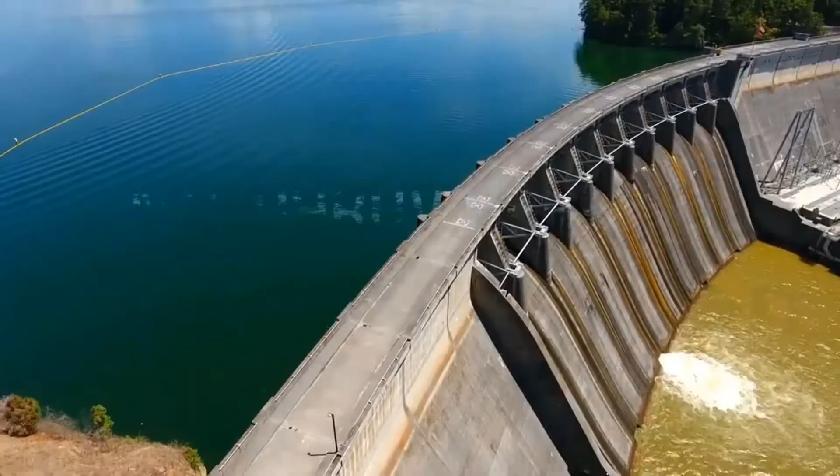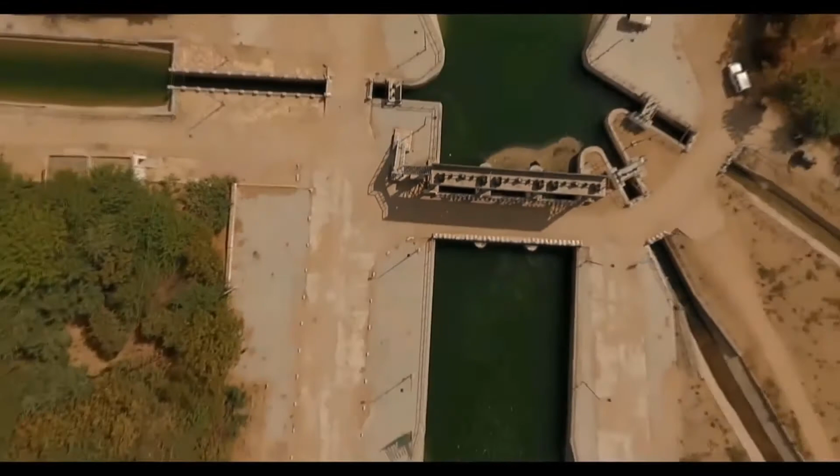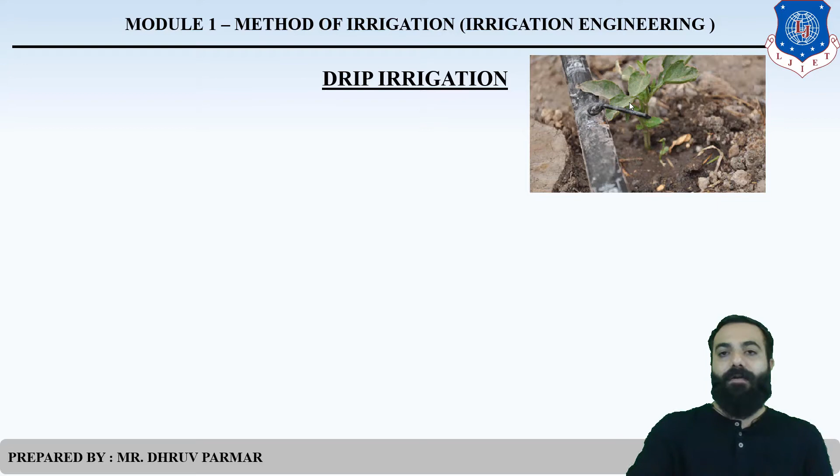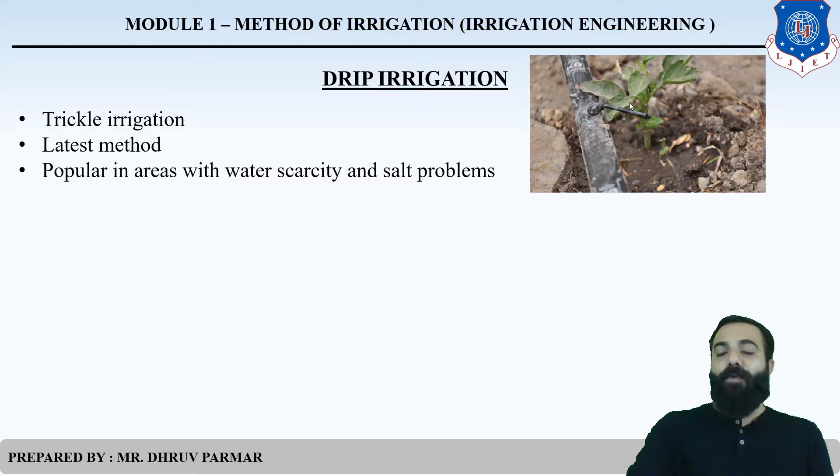Water is applied in the form of drops directly near the root zone, so evaporation loss, transpiration loss, conveyance loss, and application loss are very low or negligible.

One device is very useful that supplies water directly to the crop, called an emitter or dripper. The emitter has drip nozzles that supply water drop by drip at a very slow rate, with a capacity of 2 to 10 liters per hour.

The water applied is sufficient to keep the soil moisture within the desirable range for plant growth, meaning within the limit of field capacity, so the plant can prosper and grow well over time.

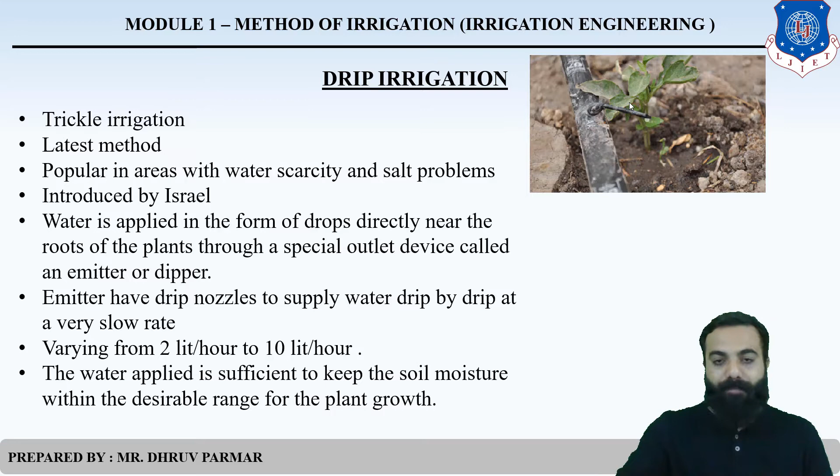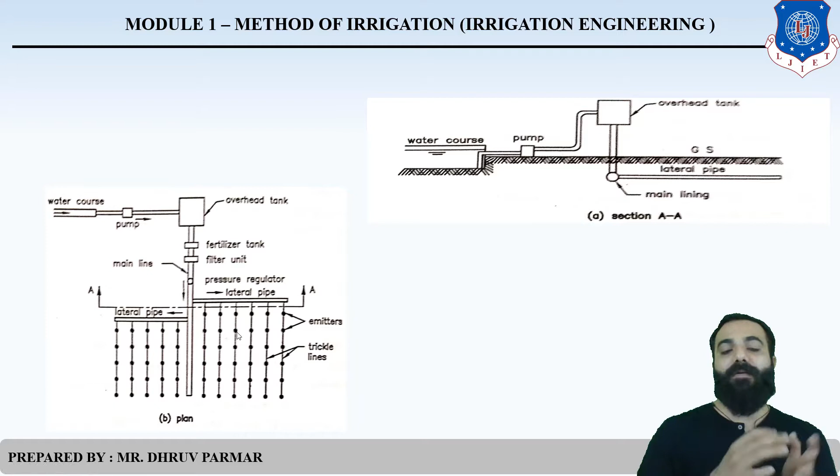This is a diagram. First there is the water course, then the pump, then the overhead tank, then the fertilizer tank if provided, then the main line, then the lateral pipe, and then the emitter or trickle. This is a plan and section used in the drip irrigation method.

There are some components. Three main components are there: control head, pipe network, and emitter. In the control head, various devices are included, such as the pump, water course, and overhead tank.

The second component is the pipe network. There are two pipes generally in drip irrigation: the main line and the lateral pipe, otherwise called the trickle line.

The third component is the emitter. The emitter is very useful for the drip irrigation method because it supplies drop by drop water to the root zone, with a capacity of 2 to 10 liters per hour.

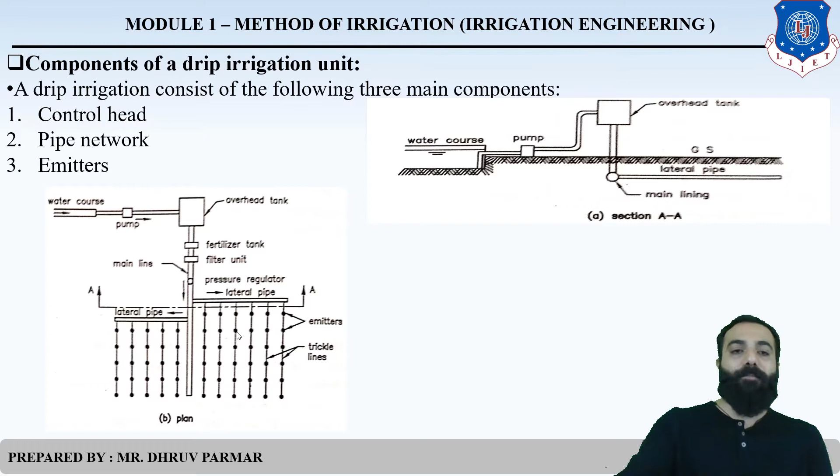So these are the components used in the drip irrigation method, which I already discussed.

The control valve, water measuring device, pressure control device, filters, and pumping unit are all included in the control head. The control head is near the source of water, and the overhead tank is usually sized 3 by 3 by 3 meters, with a head height of 3 to 5 meters.

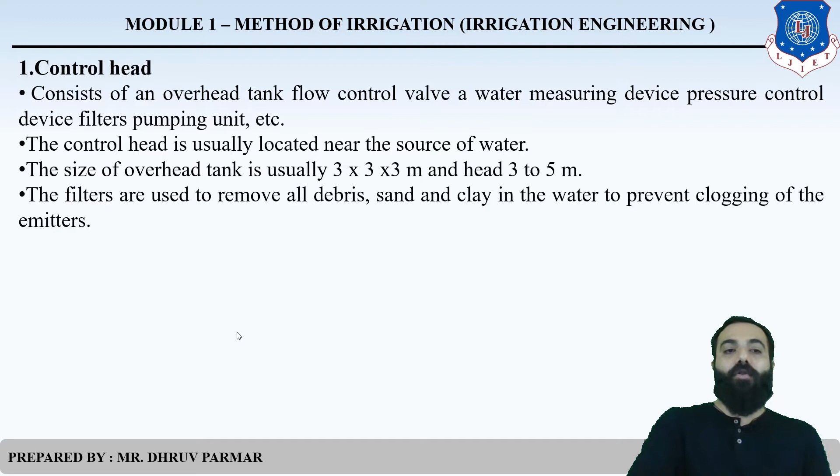There are various types of filters used to remove all debris like sand, clay, and leaves. The use of a filter is to prevent clogging of the emitter, because the emitter has small tiny holes.

And the pipe network, already explained, and the emitter, which is already discussed.

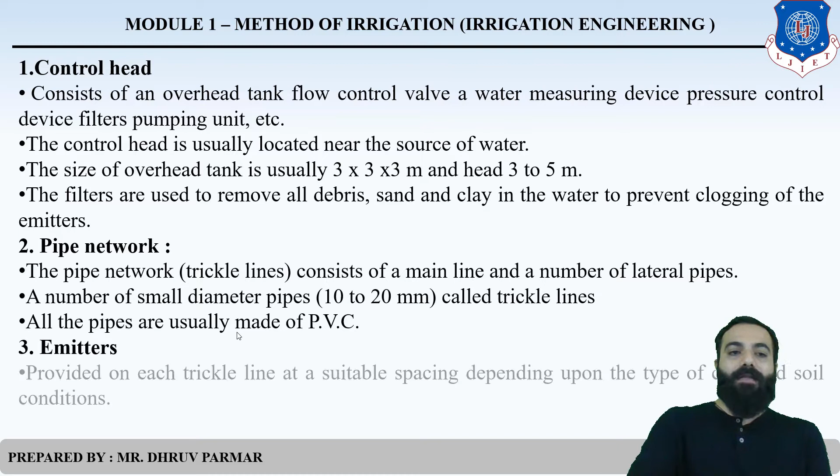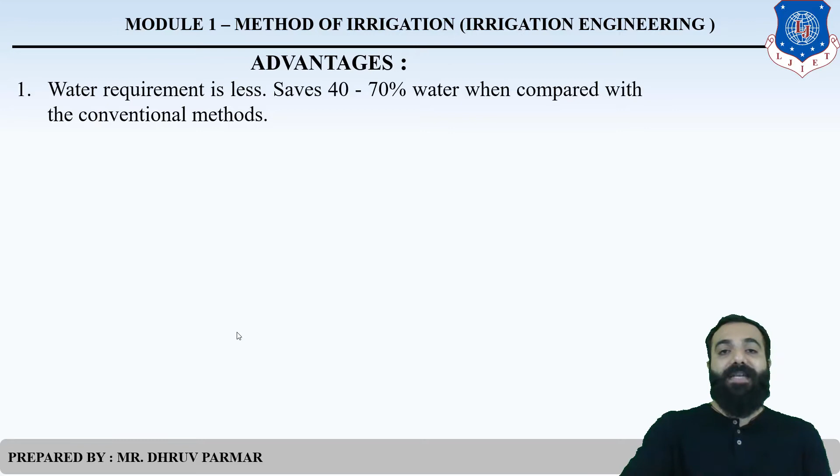Then, advantages of drip irrigation. Water requirement is less compared to other methods, saving 40 to 70% water compared with the conventional method. Evaporation losses are quite low because water is supplied directly to the root.

Labor cost is also reduced, as no field channels or furrows are required. Water logging is avoided because a minimum amount of water is supplied. This method is very useful for small trees, widely spaced plants, and some fruits.

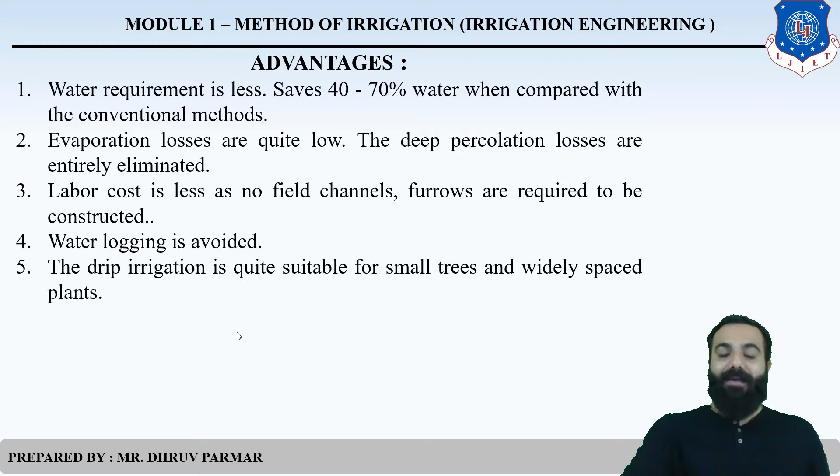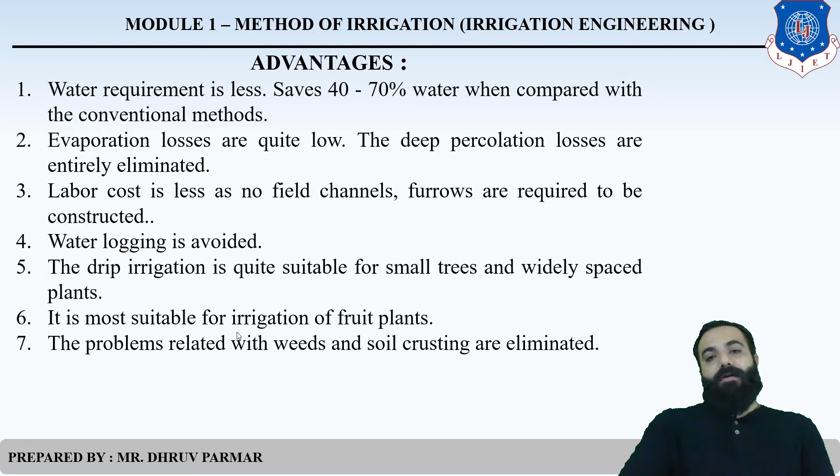Problems related to weeds and soil crusting are eliminated because water is supplied directly to the root. This method is quite suitable for arid regions, and unlike sprinkler irrigation, which is not used in arid regions, drip irrigation is used there.

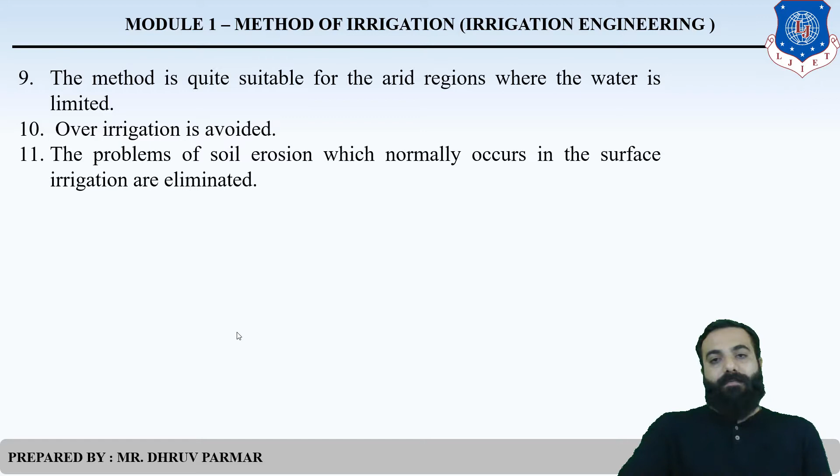Over-irrigation is avoided because there is controlled application of water. The problems of soil erosion, which normally occur in surface irrigation, are eliminated.

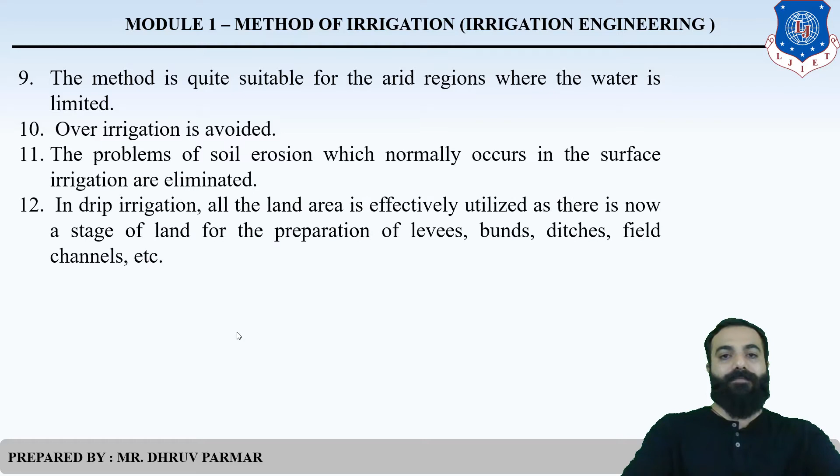So these are some advantages of drip irrigation. Now some disadvantages: initial cost is very high because a lot of equipment is required, such as the pumping unit, filter, pipeline, and nozzle.

The nozzle or emitter diameter is very small, so this hole is frequently clogged by debris like clay, silt, and leaves.

Due to the change of crop or crop pattern, the trickle lines need to be replaced because spacing also changes between crops.

This method is not used for closely planted crops like wheat, rice, and sugarcane, where the crop spacing is very close.

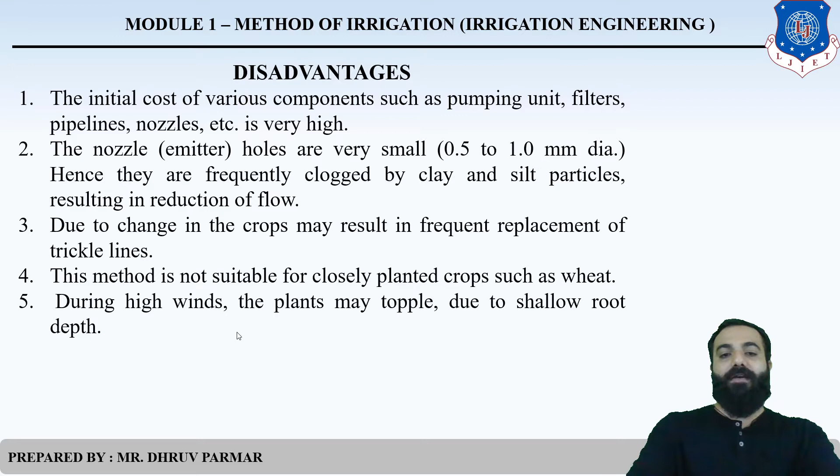During high wind, meaning when wind velocity is high, the plant may be toppled or removed by the wind.

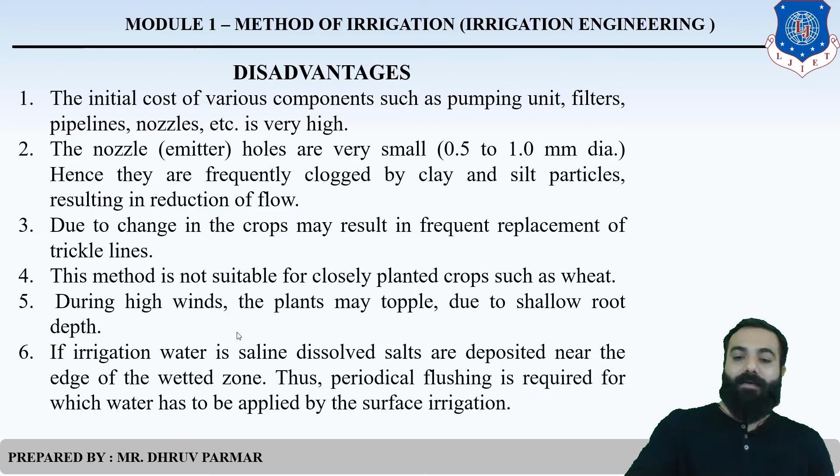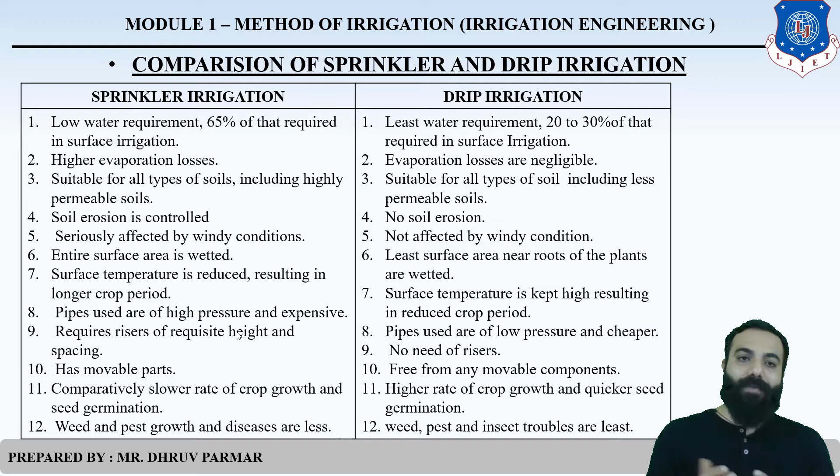There are comparisons of sprinkler and drip irrigation methods, which were already discussed in the theory. Please remember that and take a screenshot if you like. Also, a comparison of surface and drip irrigation was already mentioned. Please take a screenshot, otherwise pause the lecture and read thoroughly.

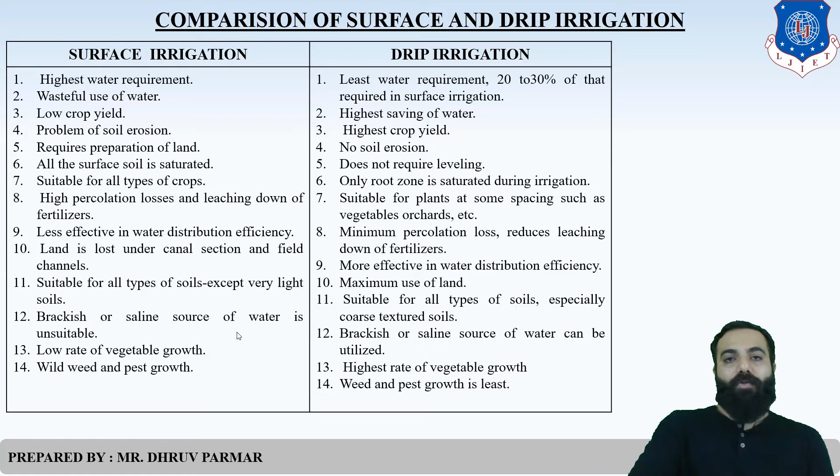So next, drippers. You know that drippers are also called emitters. You already know the use or purpose of drippers, and what their capacity is.

The capacity is 1 to 10 liters per hour, and the maximum capacity is 15 liters per hour. These emitters are used in this drip irrigation method.

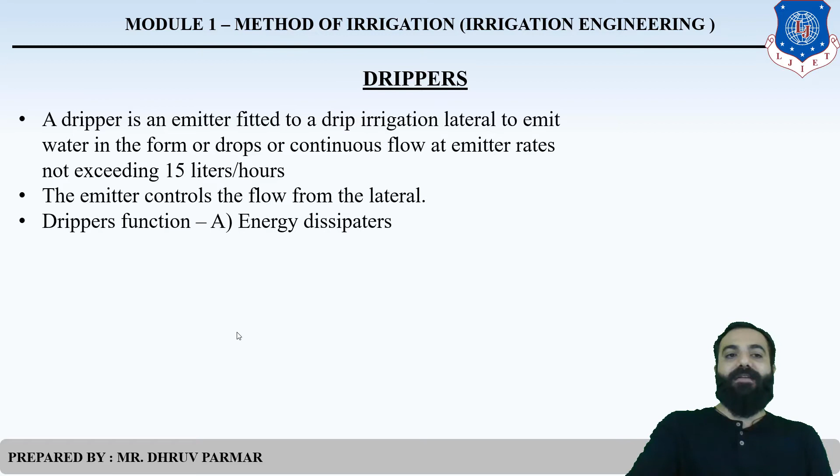Drippers function like energy dissipators. Their function is to dissipate energy and reduce the pressure head in the pipe, from 0.3 to 1.5 atmospheres down to 0 atmosphere at the outlet.

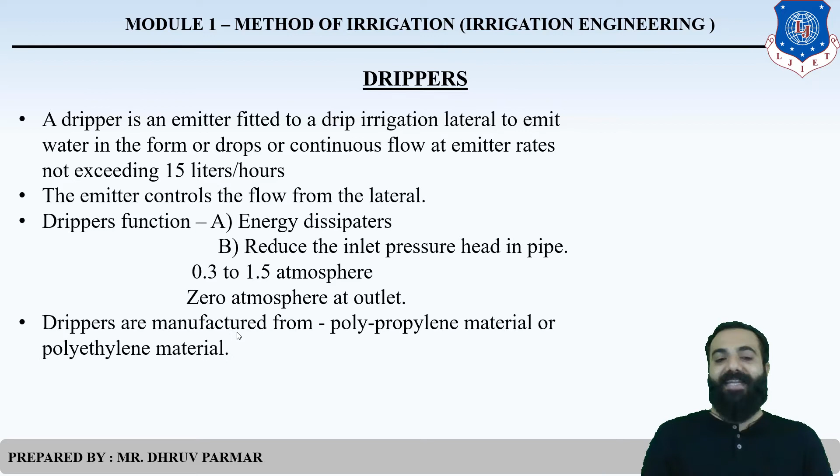So what is the material of dripper? Polypropylene or polyethylene material is used in making a dripper.

There are various types of emitter as per ASAE, American Society of Agricultural Engineers. First, the emitter which is designed to dissipate the pressure and discharge a small uniform flow to the root zone. Then compensating emitter, designed for discharge of water at a constant rate over a wide range of operating pressure, meaning even with differences in pressure, the amount of water supplied to the crop remains constant.

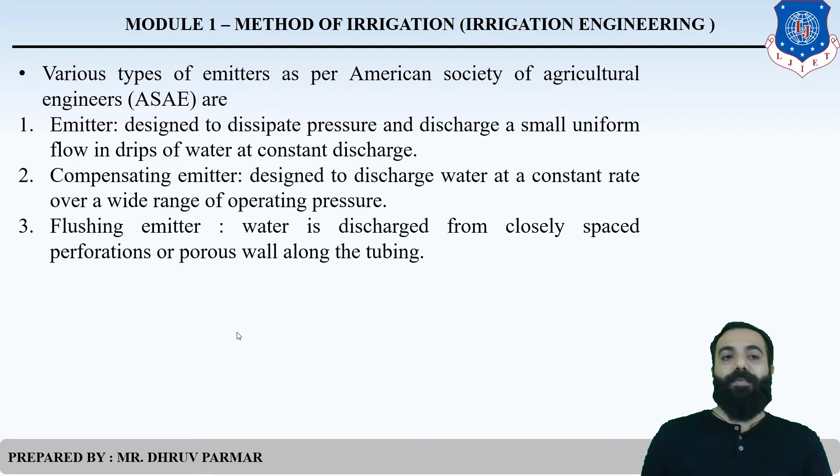Then third, flushing emitter. What is the flushing emitter? Water is discharged from closely spaced perforations or a porous wall along the tube.

Then long path emitter. In this emitter, long capillary side tubes or channels are used to dissipate the pressure.

Then fifth, multi-outlet emitter. Water is supplied through a multi-outlet emitter which has two or more points through small diameter openings, supplying more amount of water to the crop.

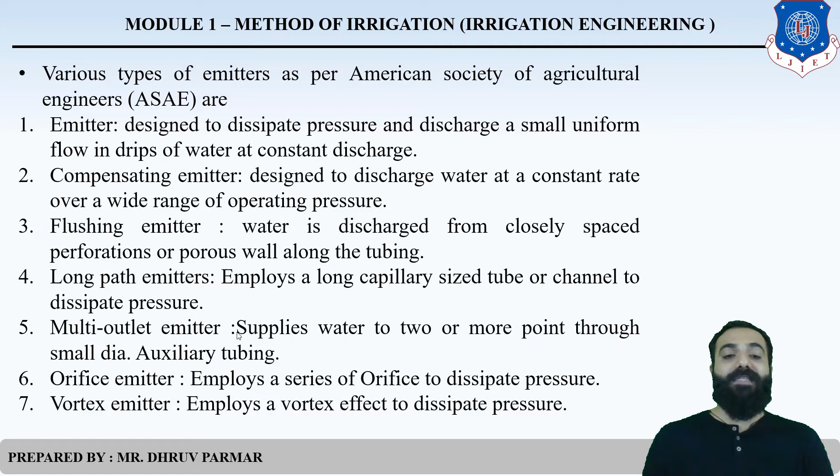Then orifice emitter, again an emitter used to dissipate the pressure. Last one, vortex, which uses the vortex effect to dissipate the pressure. So there are a total of 7 types of emitters used.

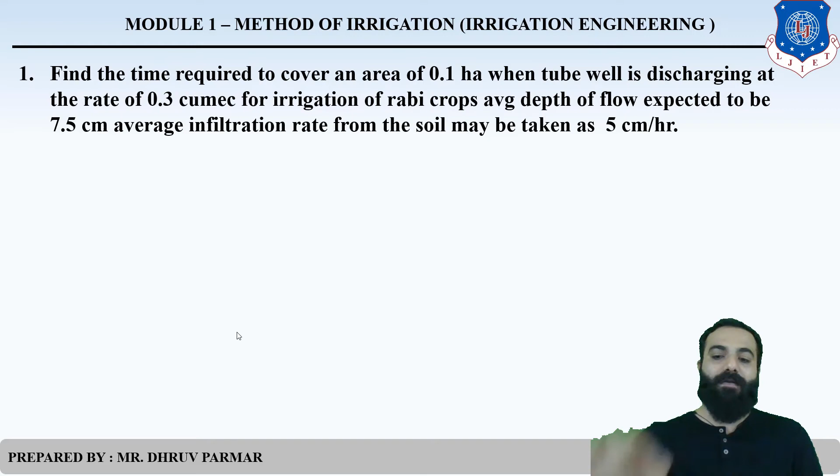Now let's move to the examples. There are 2 examples. The area given is 0.1 hectare, with discharge 0.3 cubic meter for rabi crops, average depth 7.5 centimeter, and average infiltration rate from the soil of 5 centimeter per hour. So how can we find the time?

The area of land, 0.1, we convert into square meter. The depth of flow given, we convert into meter. The discharge and depth of water flowing, which is 7.5 centimeter, we also convert into meter.

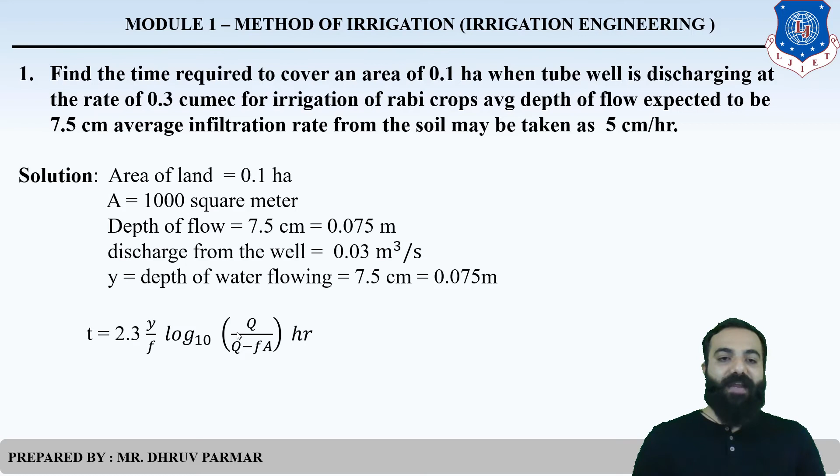The formula to find time: T equals 2.3y divided by f, log of q divided by (q minus f into a), into hour. We put all these values in this equation and get 0.931 hour. Otherwise we convert into minutes to get the time required to cover the area.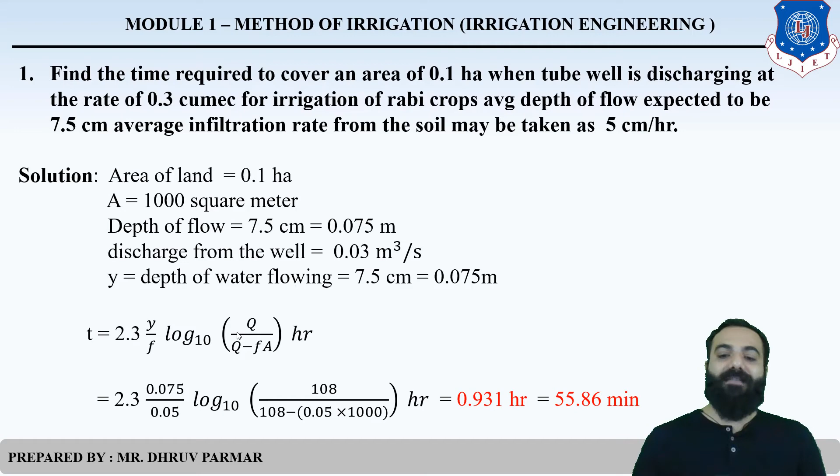The next one, this is a formula used. This is an example on the method of average, to estimate the average depth of irrigation.

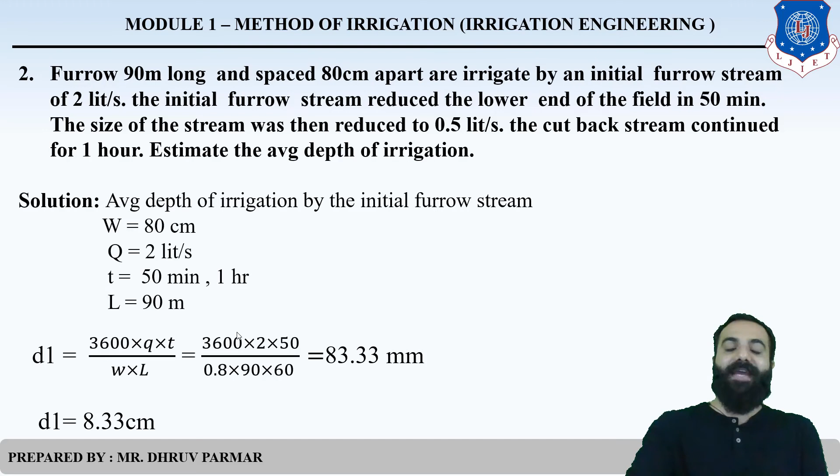What is the time? 50 minutes. What is the spacing? 0.8 meter, converted from centimeter, and length is 90 meter. The time is 50, which we convert to hour by dividing by 60, giving us D1 equals 8.33 centimeter.

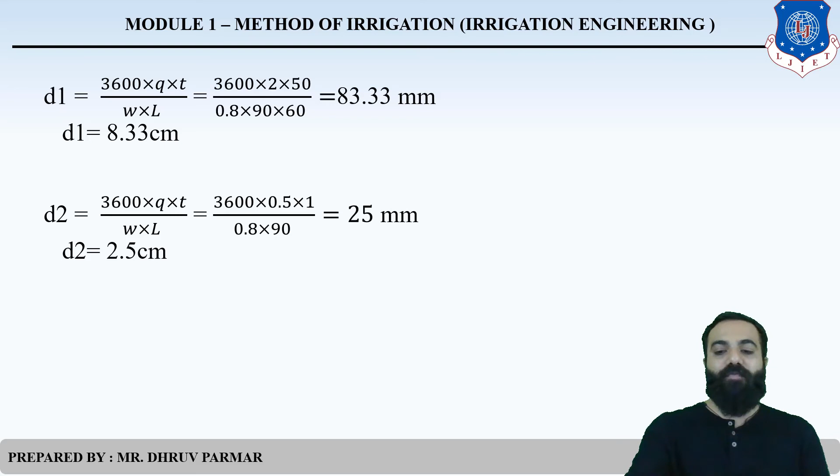Similarly D2 equals 3600QT divided by W into L. We have discharge for 1 hour which is 0.5 liter per second, with the same dimensions of width and length, giving us 2.5. So we have two depths, which we add to get the net average depth: 8.33 plus 2.5 equals 10.83.

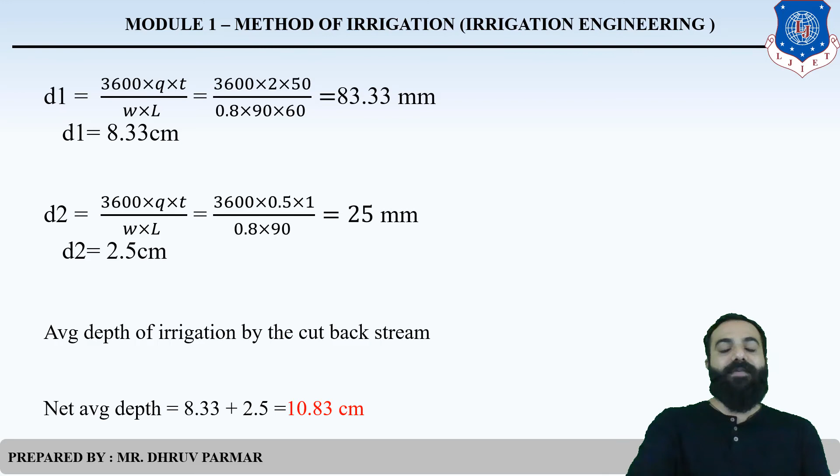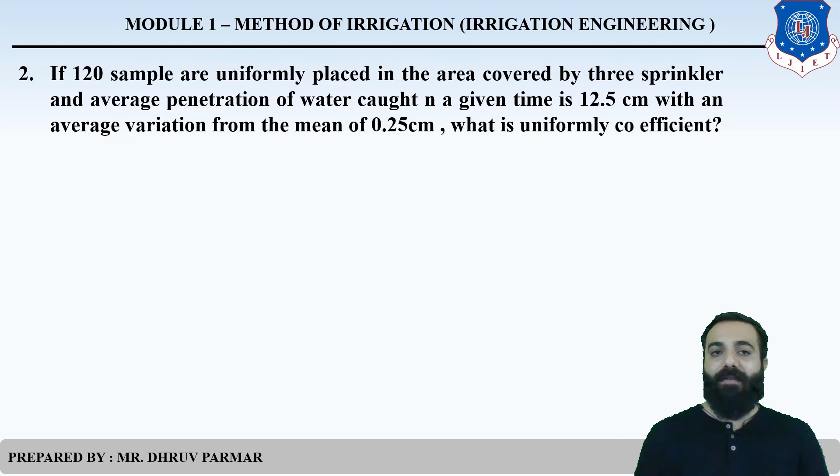The next one, example to find out the uniformity coefficient, which we already discussed. The sample is 120, taken by three sprinklers, with average penetration rate 12.5 centimeter and mean deviation 0.25 centimeter.

So what is the formula of CU? M equals average penetration, 1.25 centimeter. In this example all units will be in mm: 12.5 mm, number of samples 120, and average deviation given as 0.25 centimeter, which we convert into mm.

The formula for coefficient of uniformity is 100 into (1 minus sigma x divided by m into n). We have sigma x equals 2.5, m equals 12.5, and n equals 120. So we get CU, meaning 80% uniformity throughout the area.

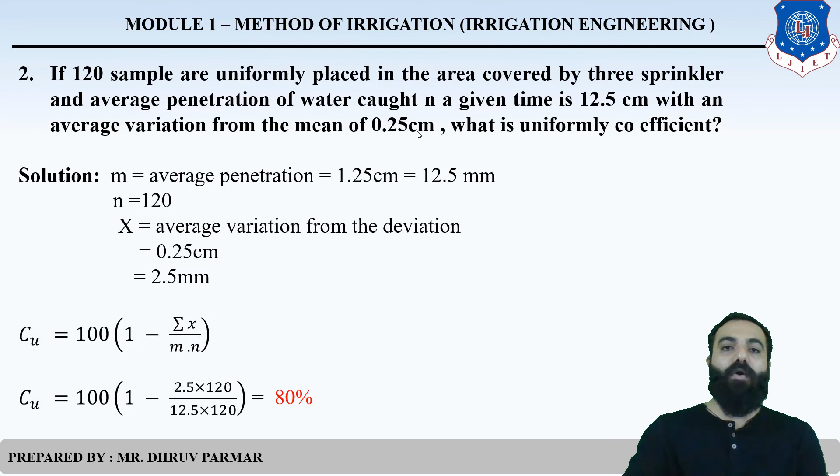So this is an example of methods of irrigation, and this is the completion of module 1. Module 1 contains 3 chapters: first introduction, second water requirement of crop, and third methods of irrigation. Thank you for your attention.